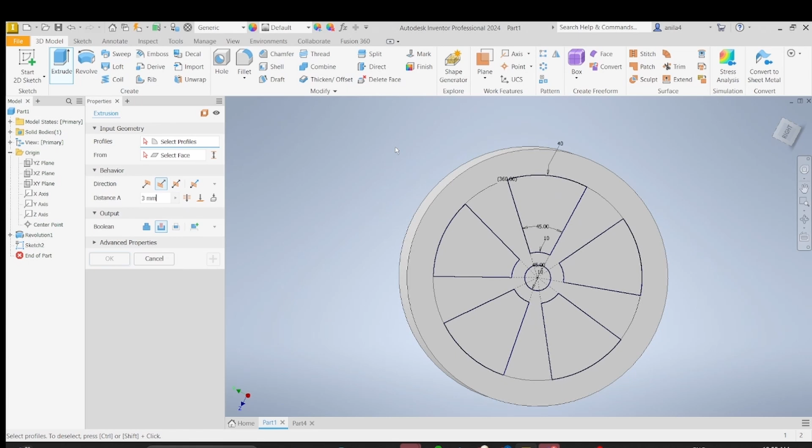To do that, we're going to use another tool called the extrude tool, located right here. Basically, think of a 2D shape - it simply pulls that upwards, stretches it upwards. We're going to use that to add some depth and cut out these shapes. So we're going to click on each feature we want to extrude - here, here, here, here, here, and the center circle over here.

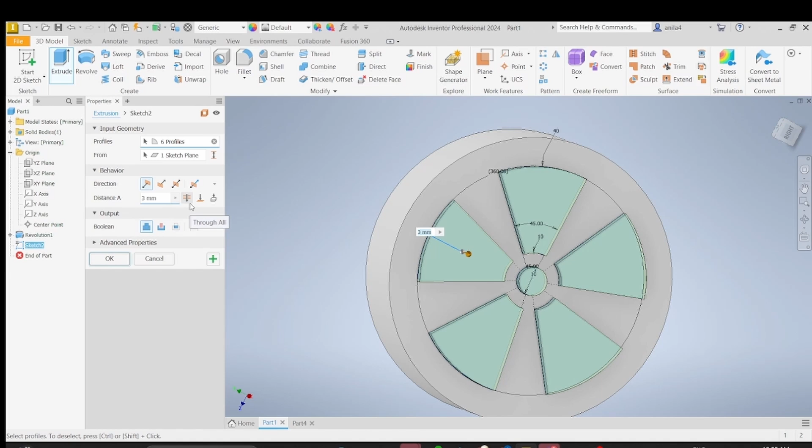And we're going to select through all, so that basically has it cut backwards through the entire shape. Click through all and click OK. And you can see that we have cut all the cutouts through the entire shape.

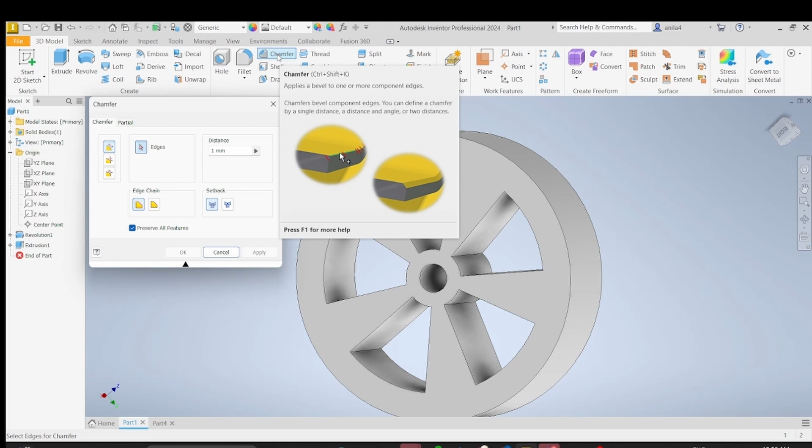Now let's add some more fine details to this. Let's add some fancy stuff. Let's use the chamfer tool here, located right here. Think of it basically as adding a bevel to a corner - if you've ever used a file, just filed down an angled edge. That's what the chamfer tool does.

So click chamfer, and this is going to be a long repetitive step, but we're going to click each spoke here, and just click all of them, each and every single one on the wheel. There, there, there, and there, there, there, there, and there. Watch out for which one you're clicking on. Click the circle one as well.

Turn it around, do the exact same thing again. There, there, there, there, there, and there. I know this is a little bit repetitive, but trust me, it's worth it. It's a useful skill to have, and also it looks nice.

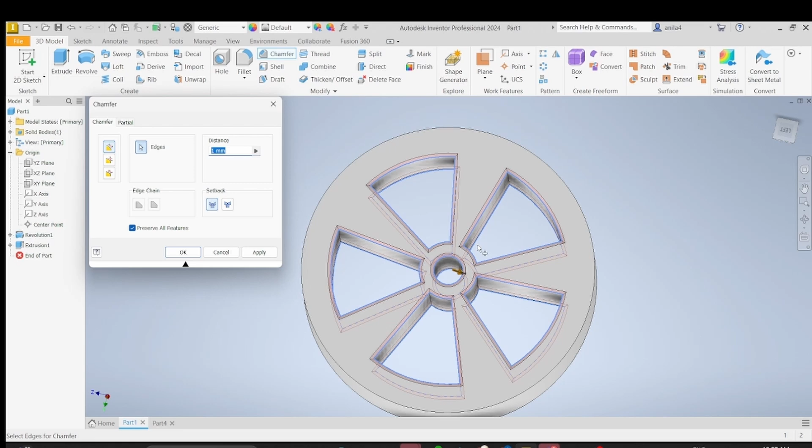Now that we've clicked every single one of them and the circle edges, let's set the distance. Mine is already set to 1 millimeter, but if it's not, set it to 1 millimeter. Click OK. And there we go - we have the nice angled edges.

Now, funny enough, on the idea of think smarter, not harder - for those of you who are a little more familiar with this, you might have noticed we could have done all of this in a lot less steps. If you're feeling daring, you can try that too. I'll just show how to do it here.

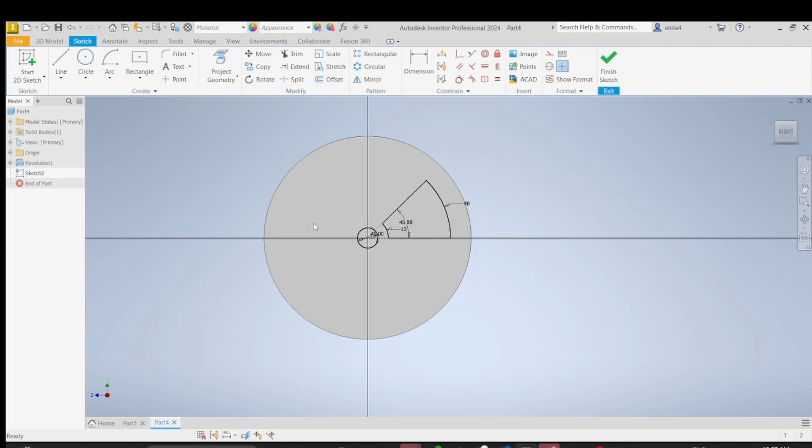Basically, this is the step before we use a circular tool to make the entire pattern around the circle. And we can get to this step from this step in less steps than we did before, if you want. So from here, finish sketch. Same thing, extrude. Click that face, through all. Click OK.

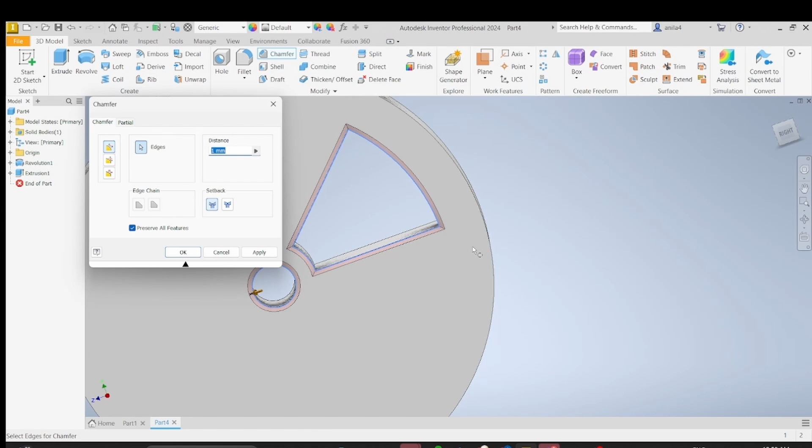And then just click chamfer and do chamfering on these edges for each and every single edge and circle. Same thing over here - there, there, there, and there. Make sure once again that that's 1 millimeter. Click OK.

And it looks like it's incomplete, and that's where we use the circular pattern tool now. Click on the circular pattern tool. On features, we're selecting features - click this extrusion and this chamfer, click both of them. Then click on this red cursor over here.

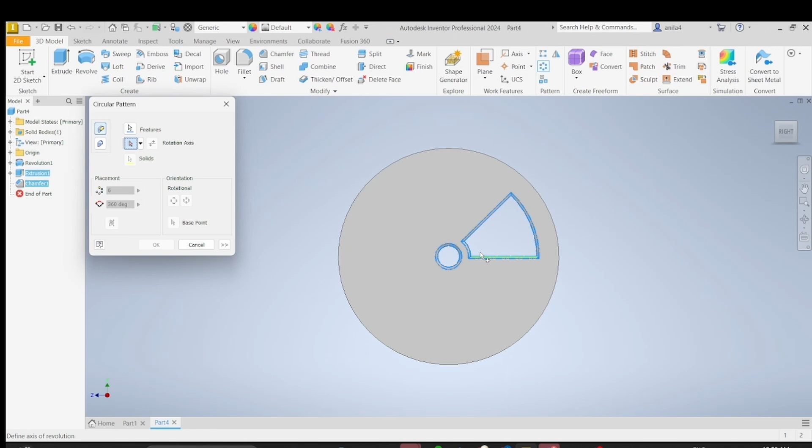That's the rotational axis, and just click along this circle over here, make sure it's this one. Click that, and let's have 5 of them, right? And there we go, we have 5. That is a lot less clicking.

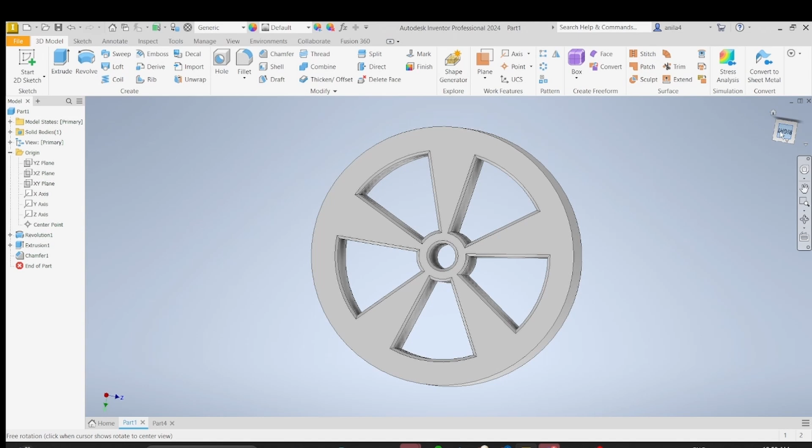But overall, this is a little bit more advanced. The way we did it before is a lot easier to get, so you do it according to your own comfort level with this.

But we're not quite there yet, as you've noticed - wheels tend to be rounded, and this is very flat. Let's fix that. We're going to use the fillet tool for that.

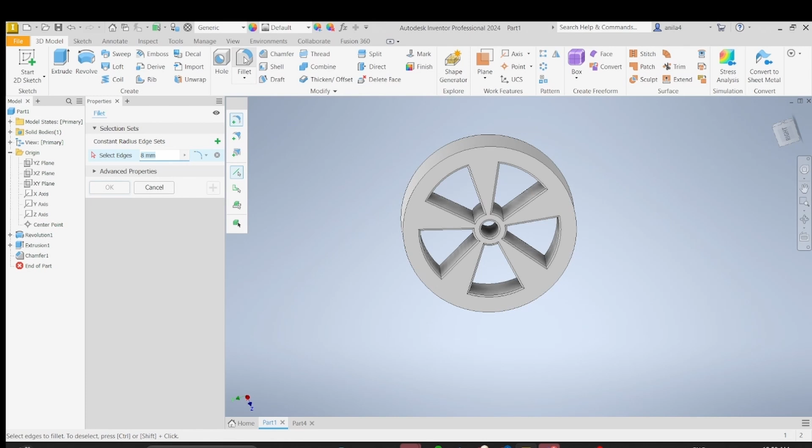Now the fillet tool is similar to the chamfer tool, except instead of angling it down to a straight edge, we're sort of smoothing it to a curve. So let's click fillet, and click on this edge over here, and this edge over here. Mine's already set to this, but make sure it's set to 8 millimeters, and click OK.

And there you go. We have ourselves what looks to be a wheel. I think it looks like a wheel, in my opinion.

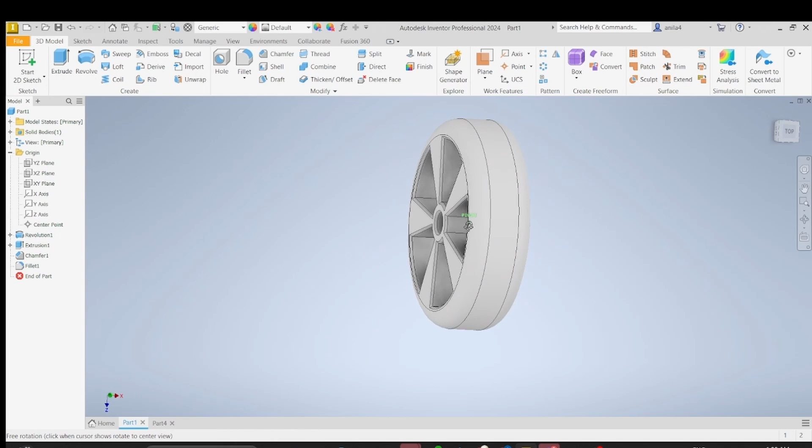Now here's a little extra challenge if you guys are a bit more up for it, if you feel like challenging yourselves, or if you're just a bit more familiar with it. A really useful tool that's helped me throughout the years is the plane tool.

Now what I'm thinking is we want to add treads onto this wheel. We want to make sure that it can grip onto things a lot more easily. So to do that, we want to use a plane tool, and we want to make sure there are textures on this surface. But how do we do that?

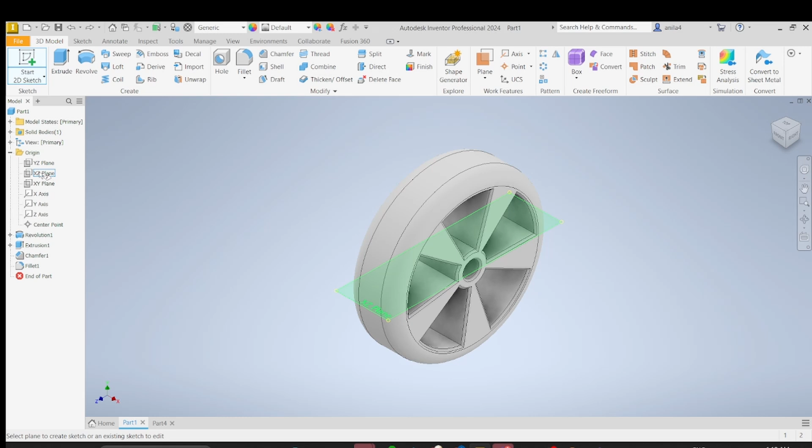Now a plane tool—first off, let's establish what a plane is. A plane is, when you start a 2D sketch, you can choose an X, Y, or Z plane. Now a plane tool is pretty much just making your own plane to start your own sketch on any of these options over here.

Now the one we're interested in is tangent to surface and parallel to plane. So we're going to click that. We're going to click this surface here because that's where we want it, and we're going to click what plane we want it to be parallel to.

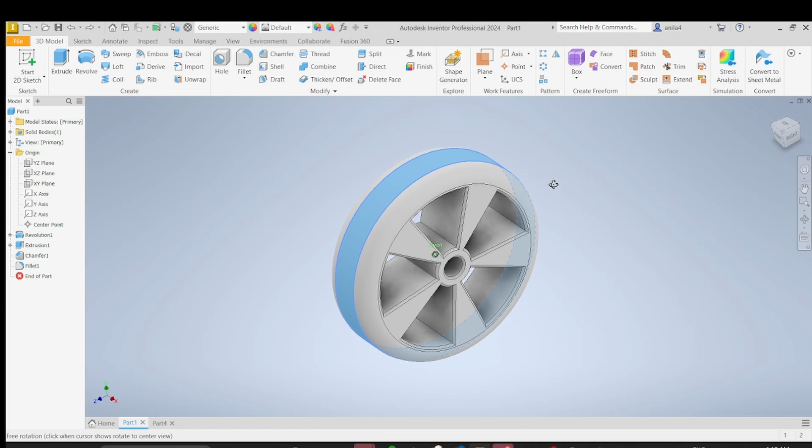I prefer to go over here, click origins, and just click on one of these planes here. Don't choose the YZ plane—we want it to be on the wheel. I would suggest the XZ plane in this case, just because that's closer.

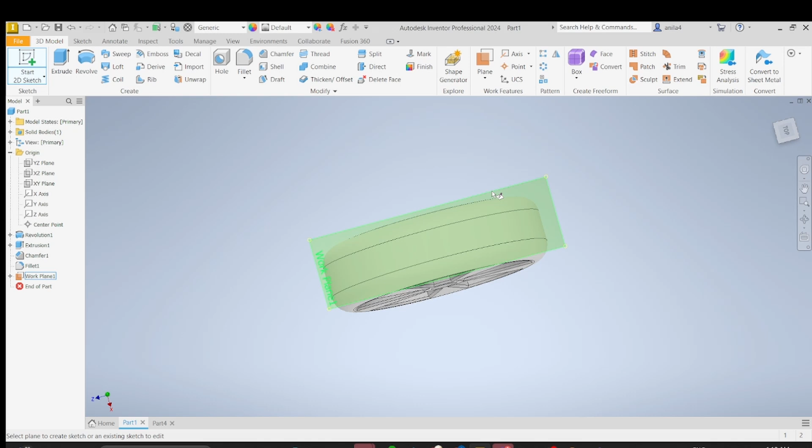And you can see we have ourselves a little plane here. And if I was to click Start 2D Sketch, I could click on this plane and make a sketch on it. And that's exactly what I'm going to do.

Now I'm going to click—let's make this a rectangle. So click 2-point center rectangle, and start from the center here.

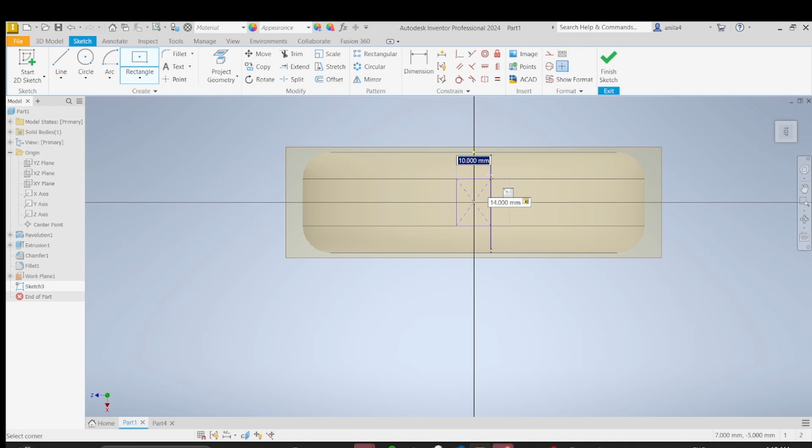Let's make this 14 millimeters long, and let's make this—actually, let's make it 6 millimeters wide. And then click OK. We have ourselves a shape. Technically, constraining isn't too big of an issue here—you should do it, but for the sake of time, I'm just going to make do with that.

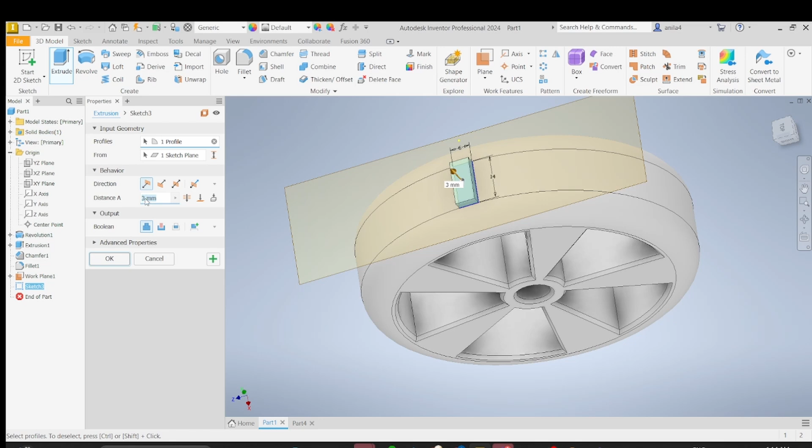So we're going to click Extrude and make sure it's on that sketch over there. Now we want to specify that we want to cut. First off, let's make sure we aren't cutting too deep in—if it was 10, we can't have that much into the wheel. So let's set it to 3 millimeters.

We're going to specify that it is going to be a cut. So click cut, and it should automatically select that option there, and click OK.

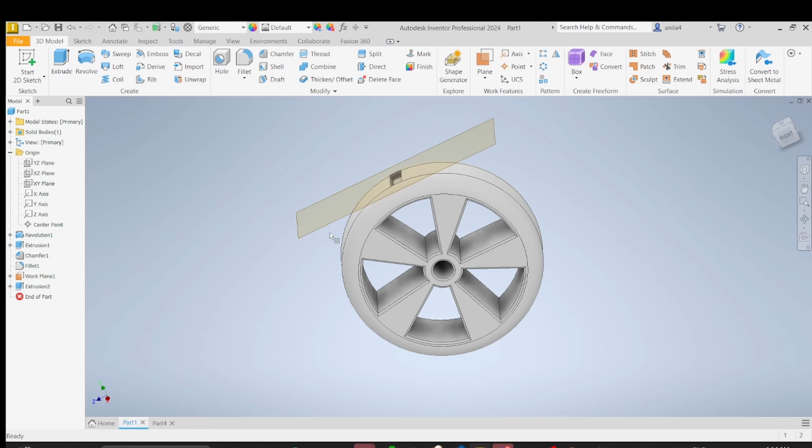And now we have a little indent in our wheel. Now to turn that into an indent along the entire wheel, we want to click the circular pattern tool, click features, and click the extrusion. And then along the rotational axis, click rotational axis, the red cursor here, and click that circle along here.

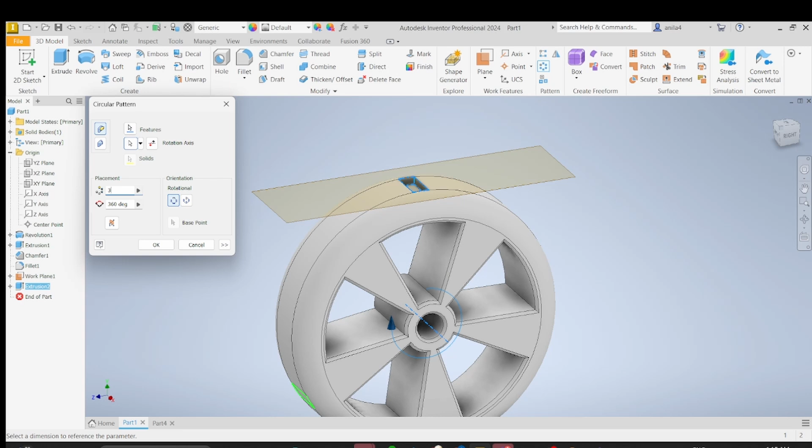And let's choose 30, anywhere between 34 and 36. I'm feeling in the mood for 35, just somewhere in the middle. Click OK, and there we go.

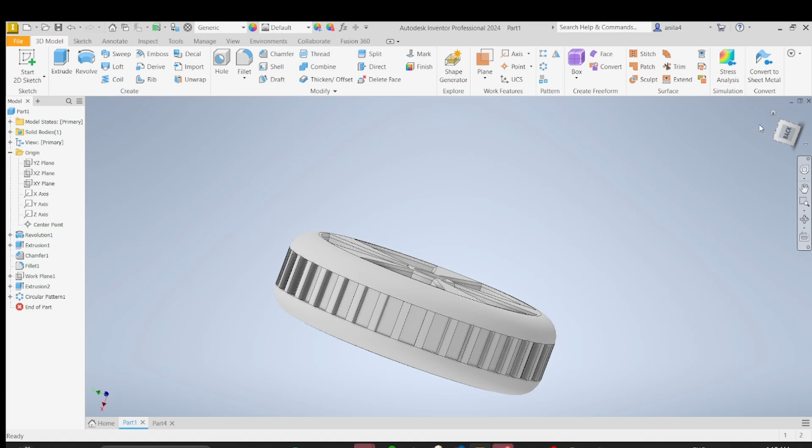And obviously, if you don't really need the sketch anymore and don't want to keep seeing it, just hover over it and right-click it, and click on visibility. That just turns off the visibility, and yeah, as you can see, now we have a little wheel with treads.

If you want, you can make a different shape, but it's the same concept nonetheless of using a plane, and it's a really useful tool overall, just a plane. But yeah, that'll be it.